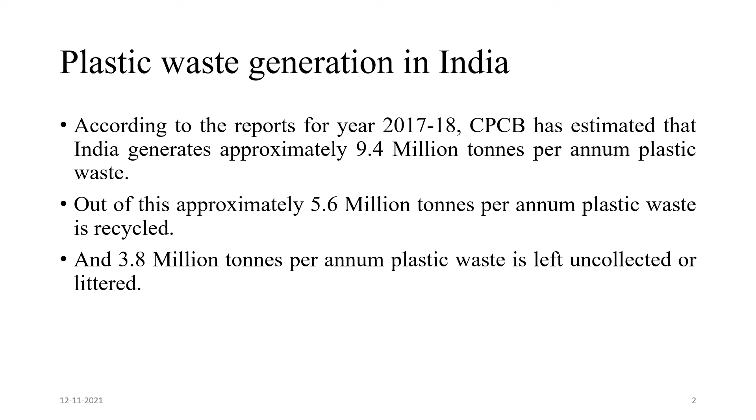First is the groundwater and soil pollution. Since we know that plastic is a material made to last forever and due to the same chemical composition, it takes hundreds of years to degrade, which leads to drainage of toxic chemicals in groundwater and also affecting the fertility of soil. Second is the pollution in oceans, where collection of plastic at its surface leads to dropping of oxygen

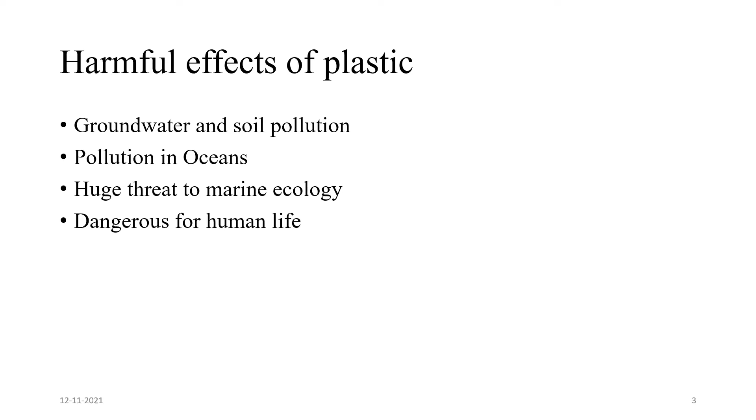level in water, severely affecting the survival of marine species, which poses high threat to marine ecology. Over 600 marine species are affected by plastics. Nearly 45,000 marine animals have ingested plastics and 80% were injured or killed. For humans, these harmful chemicals can cause severe health issues including cancer, birth defects, reproductive damage, asthma, and multiple organ damage.

So, by far, knowing such dreadful effects of plastic, a natural thought could arise that if it is so harmful, then either ban it or replace it. But could plastic ban be an effective solution? Let's have a look at this. Though the idea of restricting the inflow by imposing a ban could have been a welcoming idea, the question on the economics, availability, and applicability of the alternatives remain unanswered.

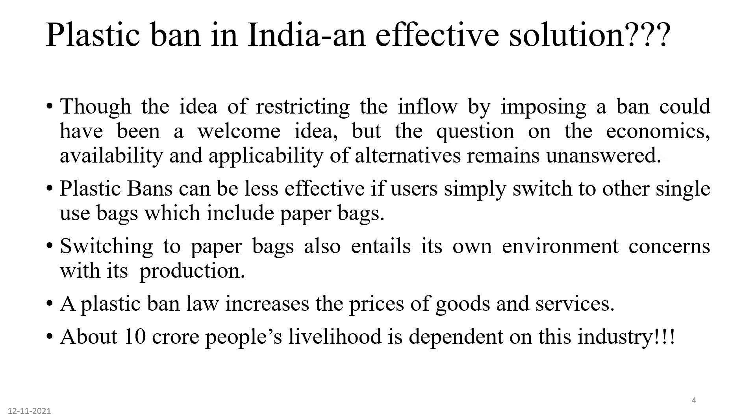Plastic bans can be less effective if users simply switch to other single-use bags, which include paper bags. Switching to paper bags also entails its own environment concerns with its production. A plastic ban law increases the prices of goods and services. About 10 crore people's livelihood is dependent on this industry. This simply proves that plastic ban is not an effective solution. So, what could be the possible solution?

Here, meet our savior, known as the Plastic Man of India, Professor Rajagopalan Vasudevan, Professor of Chemistry at Thiagarajar College of Engineering, Madurai. Working in his laboratory, the results of mixing waste plastic with solid waste and coating the mixture over stone proved positive. He got his idea implemented through the use of plastic waste on a road constructed inside the premises of his college in 2002.

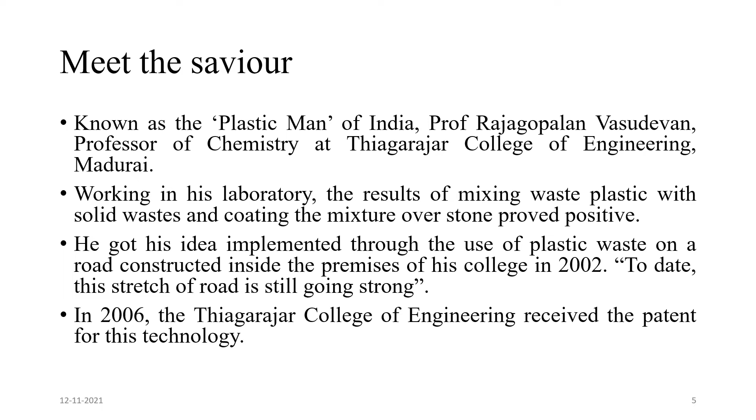To date, this stretch of road is still going strong. In 2006, the Thiagarajar College of Engineering received the patent for this technology. Dr. Vasudevan was honored with one of India's highest civilian awards, the Padma Shri, for his groundbreaking research on reusing waste plastic in a very unusual way.

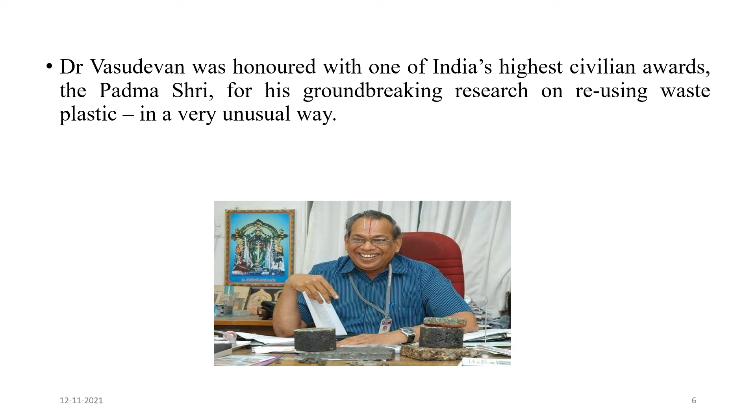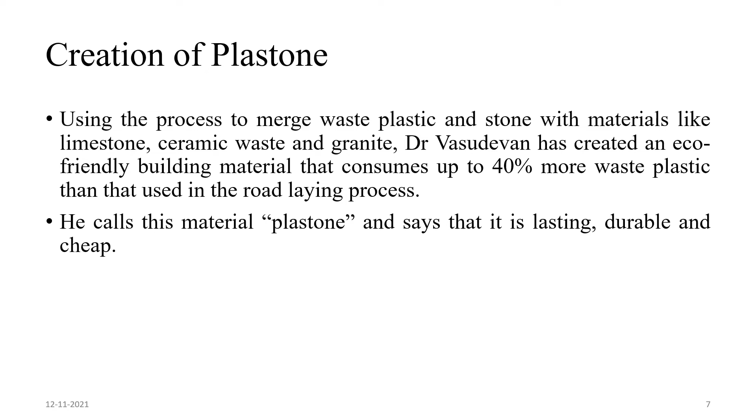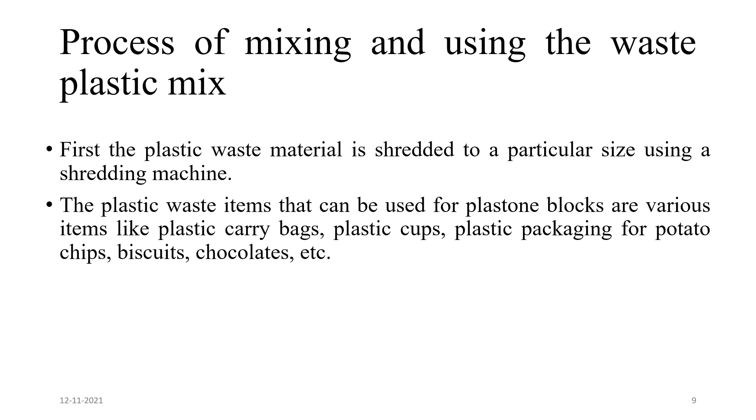So now, what is the process? The process of mixing and using the waste plastic mix. First, the plastic waste material is shredded to a particular size using a shredding machine. The plastic waste items that can be used for Plastone blocks are various items like plastic carry bags, plastic cups, and plastic packaging of various eatables, etc.

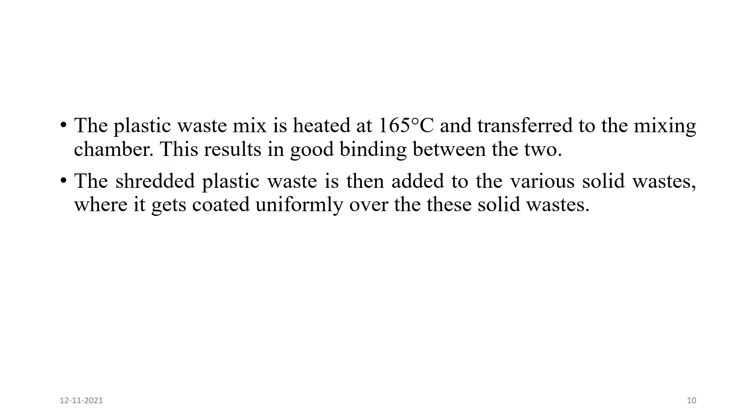The plastic waste mix is heated at 165 degrees Celsius and transferred to the mixing chamber. This results in good binding between the two. The shredded plastic waste is then added to the various solid wastes where it gets coated uniformly over these solid wastes. Wait, isn't burning plastics a cause of pollution?

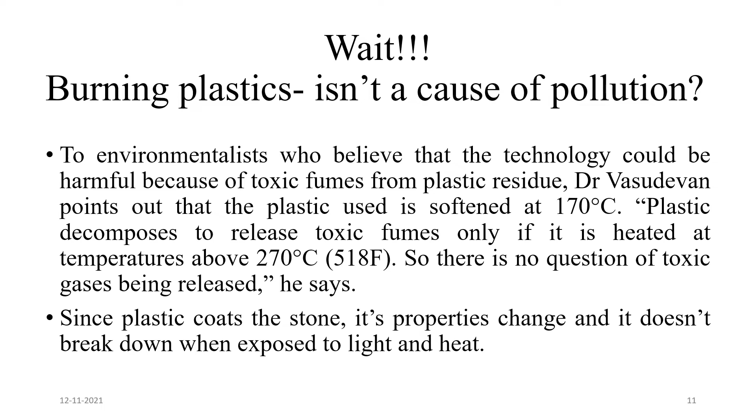To environmentalists who believe that the technology could be harmful because of the toxic fumes from plastic residue, Dr. Vasudevan points out that the plastic used is softened at 170 degrees Celsius. Plastic decomposes to release toxic fumes only if it is heated at temperatures above 270 degrees Celsius. So there is no question of toxic gases being released, he says. Since plastic coats the stone, its property changes and it doesn't break down when exposed to light and heat.

Advantages achieved. Plastic rag pickers not only get an additional chore, but they also get a means to earn. It is not necessary to have conventional materials to make Plastone. Construction debris will ideally combine with waste plastic. Use of water is minimal and it is possible to provide attractive surface finishing for each block.

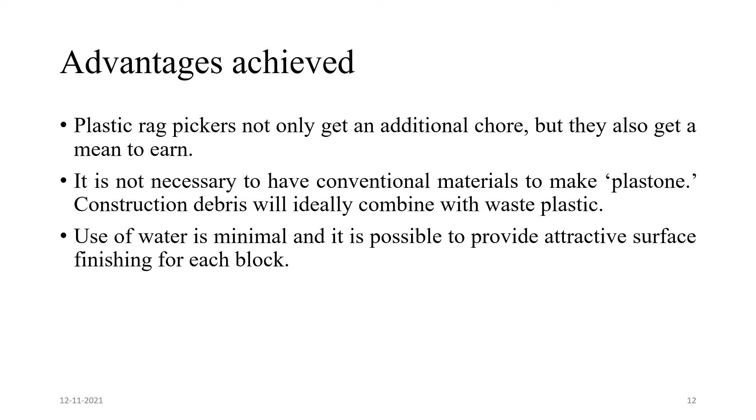Plastone blocks have undergone strenuous tests at the laboratory and can withstand 300 tons of load. Each block measures 30 cm in length and has half an inch thickness, which can consume up to 15 PET bottles. It is 10 times stronger than concrete.

Along with the plastic waste, we are also using solid wastes, including the demolition waste, ceramic waste, gypsum, fly ash, slags, concrete debris, leading to less burden on landfills and providing us more free spaces. Thus, here we are achieving two goals simultaneously with a single arrow, that is, reducing the burden on landfills and making more spaces available and utilizing all the wastes into a useful product.

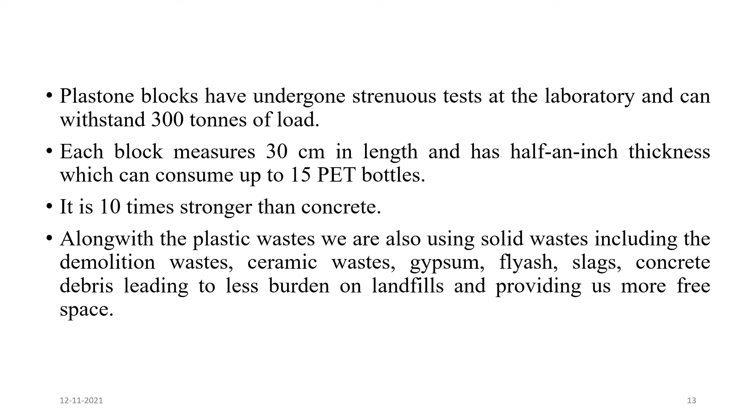Various applications. Plastone can be used for flooring, especially for outdoors. It can be a cheap and strong substitute for cement blocks, which have a tendency to wither away in constant rain. It can be an effective liner for water bodies, especially canals, preventing water seepage. It can also be used to raise compound walls. A coat of emulsion can be provided to make it colorful and attractive.

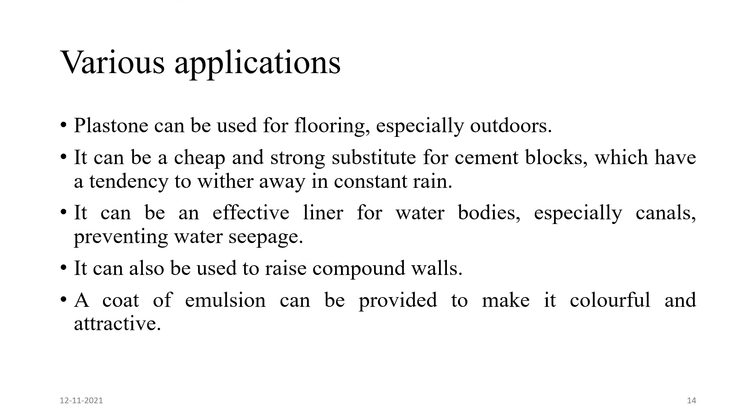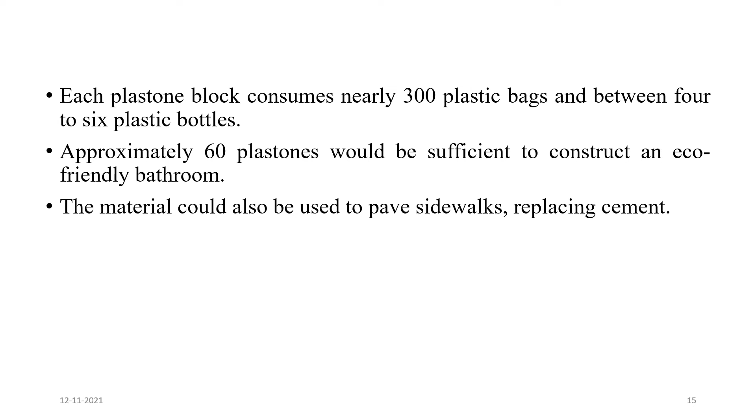Each plastone block consumes nearly 300 plastic bags and between 4 to 6 plastic bottles. Approximately 60 plastones would be sufficient to construct an eco-friendly bathroom. The material could also be used to pave sidewalks, replacing cement.

There are many innovations done based on great ideas, but for most of them, the most prevailing limitation is the cost of construction. Let's have a look at the cost of plastone. A comparative cost analysis between toilet structures constructed using the traditional method and using plastone blocks is done. Rate for the construction of a 4 by 4 by 7 toilet structure using plastone block is about 7,556 rupees.

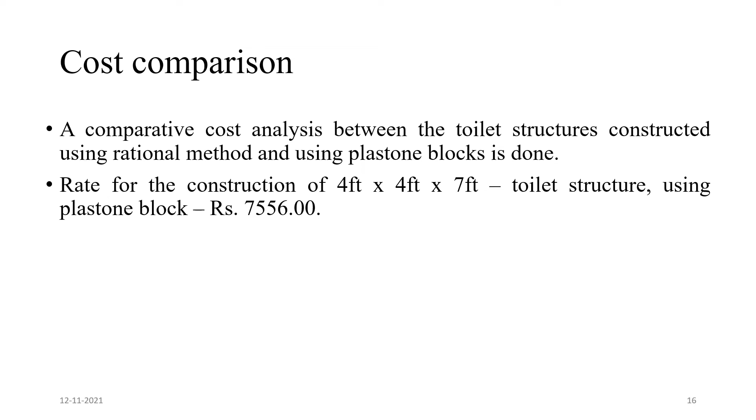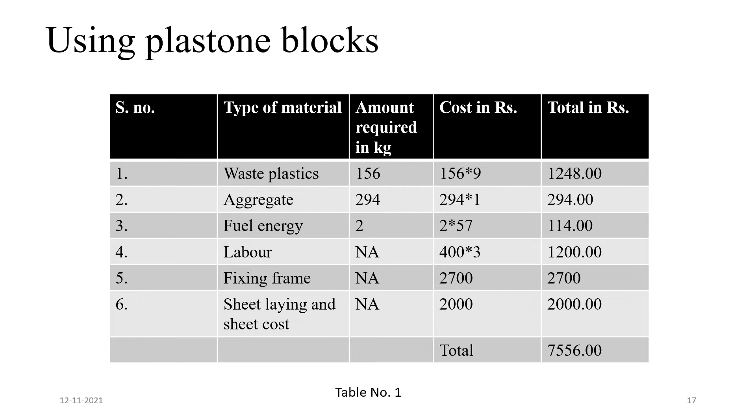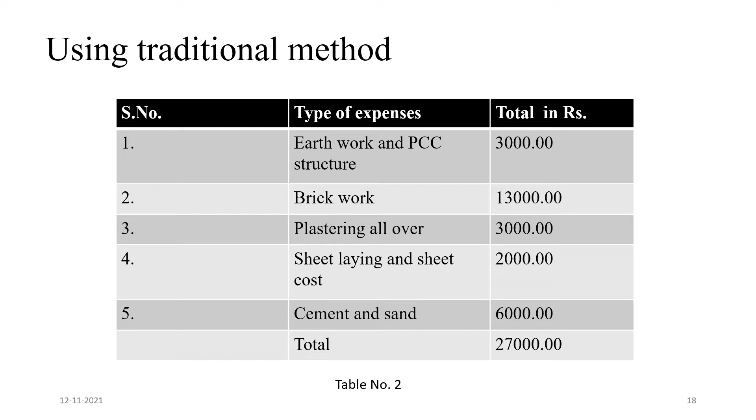Using the plastone blocks, the cost incurred in constructing a toilet structure is about 7,556 rupees. Whereas using the traditional method, the cost incurred in building a toilet structure of the same size is about 27,000 rupees, which simply proves that the toilet structures made of plastone are about 3 times cheaper than toilets constructed using traditional means. This simply implies that construction using plastone blocks is very economical and thus can replace the traditional method of constructing toilets.

Now presenting you the case study. According to the research conducted by Dr. R. Vasudevan, Dr. A. Ramalinga Chandrasekhar and Mr. B. Sundarakannan from Thiagarajar College of Engineering, Madurai, plastone is a material prepared using waste plastics available in the solid waste of the particular area, which can be segregated and used as a binder with the stone aggregate. This prefabricated plastone can be used in the construction of toilet blocks, individual household latrines.

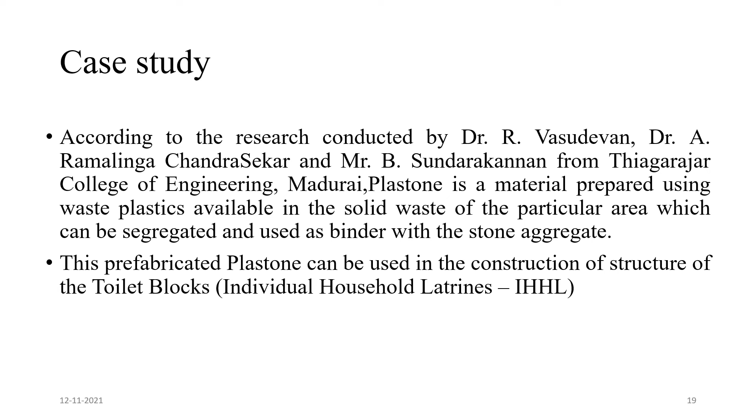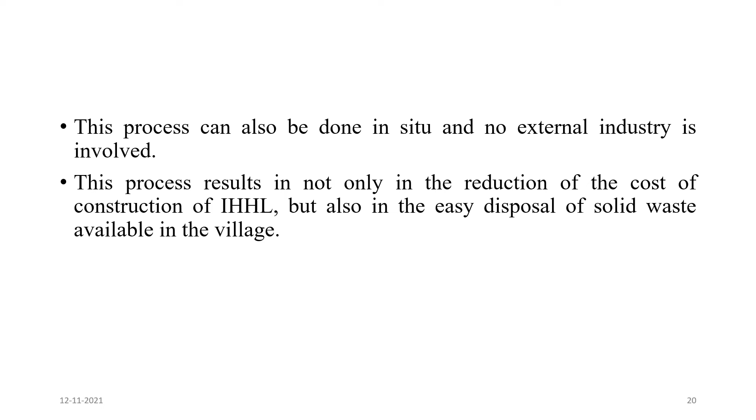This process can also be done in situ and no external industry is involved. This process results not only in the reduction of the cost of construction of IHHL but also in the easy disposal of solid waste available in the village. Under the Swachh Bharat Abhiyan scheme, the state is promoting construction and use of sanitary latrines at all households. According to the Principal Secretary Environment, they have decided to procure the technology and even the tiles made of plastic from Professor Vasudevan and plan to use them in construction of toilets since they are non-porous and prevent water penetration.

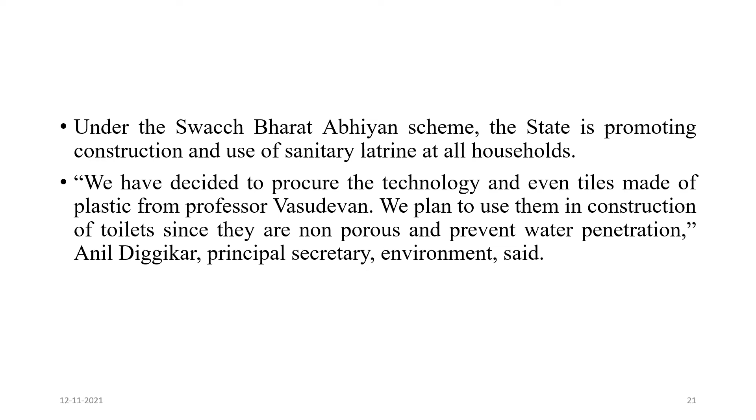As per estimates, Maharashtra's 27,902 Gram Panchayats have 1.15 crore houses, of which 63.67 lakh or 55% are without toilets. The government had constructed 12.79 lakh individual toilets at rupees 656 crore by the end of 2017. The cost of constructing a single unit could significantly come down with the use of Plastone. The centre had sanctioned a rupees 17.16 lakh project to study the possibility of building low-cost hygienic toilets in villages using prefabricated structures made of waste plastic stone blocks.

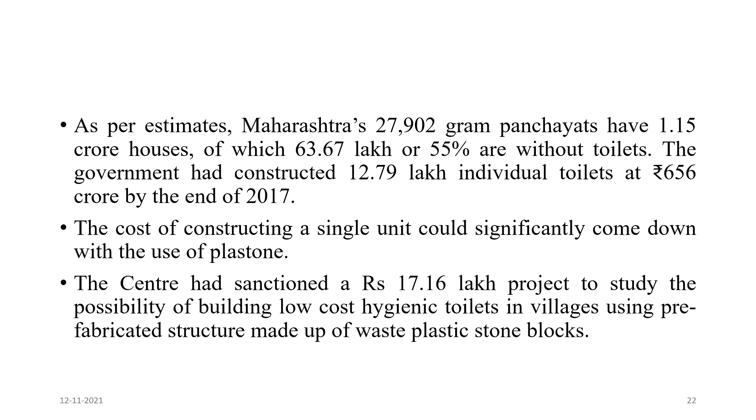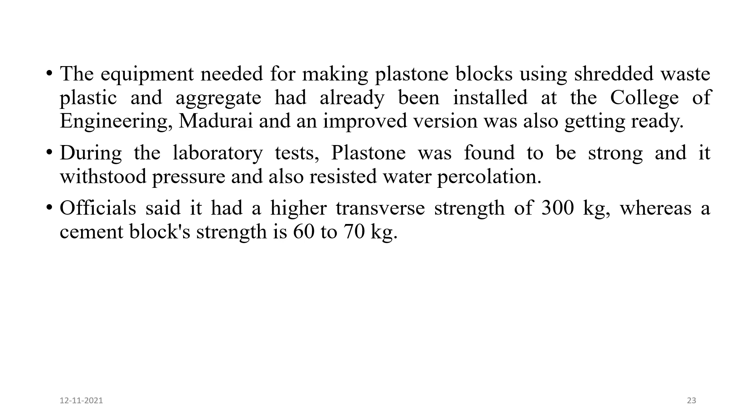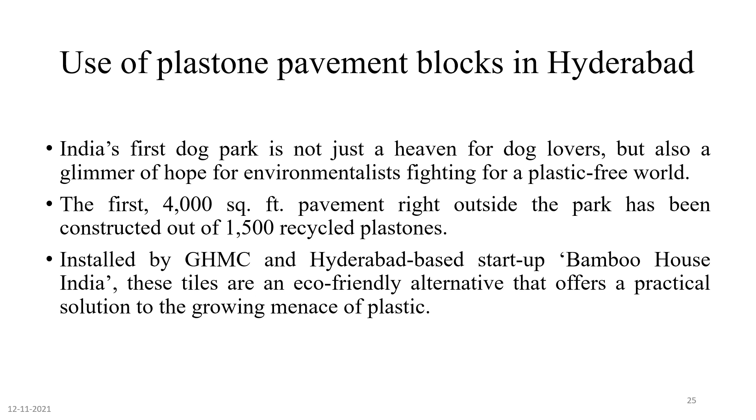Conclusion: it's time we stop seeing plastic as the enemy and turn it into our biggest resource. According to the optimistic approach, we are now producing enough plastic to construct the plastones and pavement blocks required by the country, and thus the aim of achieving a plastic free world is not only clearly visible but we have also started the journey to meet our goals. Thus, plastic could prove to be a boon to us if wise and judicious use of it is performed.